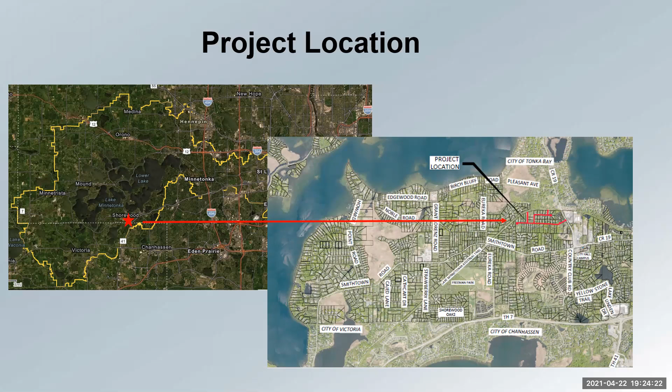The City of Shorewood is proposing to reconstruct, widen, and install curb and gutter along 3 roads within the Glen, Amlee, and Manitou residential area located in the northeast portion of the city. The area is located within the middle of our watershed and spans across 2 sub-watersheds that drain towards Lake Minnetonka. As a closer view, the white box highlights the 3 roads that make up the proposed project. This area is adjacent to the Lake Minnetonka Regional Trail, shown at the top of your screen to the north, with the City of Tonka Bay on the other side of the trail.

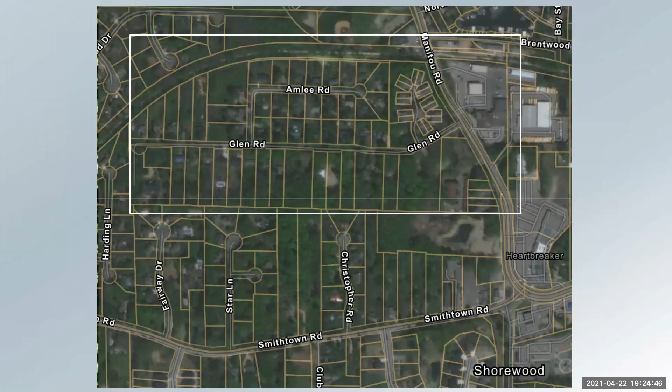Because this is a linear project spanning a number of roads, I wanted to ground the board with an aerial showing the existing conditions within the project area as a whole. While zoomed out, it shows Glen, Amlee, and Manitou roads in their entirety. Currently, runoff in this area flows overland, represented generally by the yellow arrows. There are 3 main existing drainage exit points within the project area, represented on the screen in blue: the Harding Lane outlet to the west, the Amlee Culvert outlet at the top of the screen which outlets underneath the trail, and the South Glen Road outlet to the east.

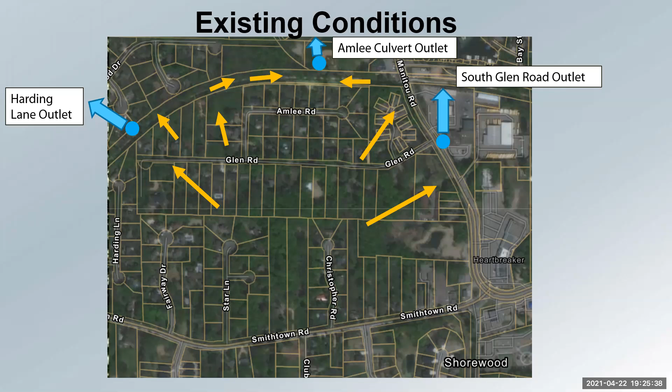According to the City of Shorewood, this area has been historically flood prone and is experiencing a number of erosion issues as a result.

There are 2 important existing features within this area I wanted to point out spatially in relation to the project, as I'll refer to them throughout the presentation. First is Amlee Wetland, a district managed 3 wetland, found at the north end of the project area, highlighted by the white box at the top of the screen. The second is an existing constructed stormwater basin referred to as Gideon's Pond, highlighted by the white star.

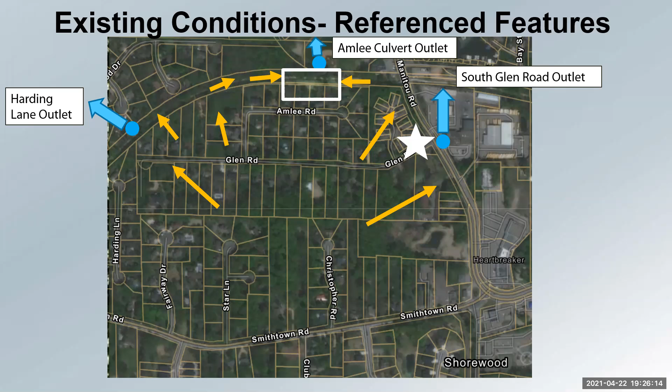Finally, this image, which might not translate well to your screen, provides a formal summary of the existing conditions, including the subcatchments used for engineering analysis, as well as drainage ditches found in the area. I won't be referencing the drainage ditches in this presentation for simplicity's sake, but further information can be found in the board packet, as these ditches were a component of the engineering and staff review.

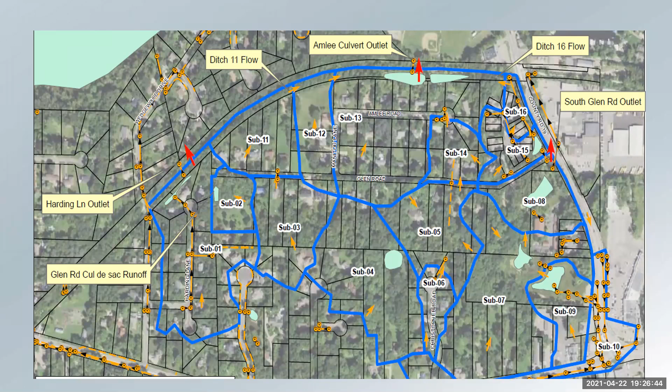As previously mentioned, the City of Shorewood is proposing to reconstruct Glen, Amlee, and Manitou, widening them and adding curb and gutter, and the associated storm sewer. A new cul-de-sac will be created at the west end of Glen Road as well, under the proposed conditions.

The stated purpose of this project is to decrease the volume of runoff through the residential properties within the area to address the historic flood and erosion issues. The yellow arrows represent a general new drainage pattern that would result from the proposed project.

In order to meet district standards, as I will discuss in the rule analysis section, the City of Shorewood is also proposing to create a new biofiltration basin to the west of Amlee Road, shown as the white star on the left, and then expand the existing Gideon's Pond, the white star on the right. In addition, a small rain garden will also be created in conjunction with that proposed Glen Road cul-de-sac.

Drainage in the area, as seen by the arrows, will be routed first through the proposed BMPs prior to exiting through those existing outlet points. This will result in a new stormwater outlet to Amlee Wetland. To clarify, this is different from the culvert that currently exists, which outlets that wetland underneath the trail.

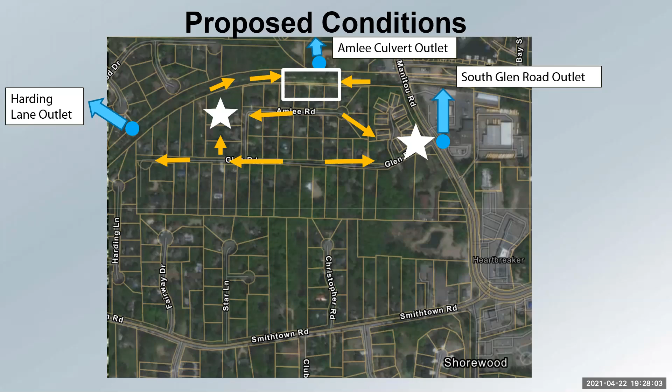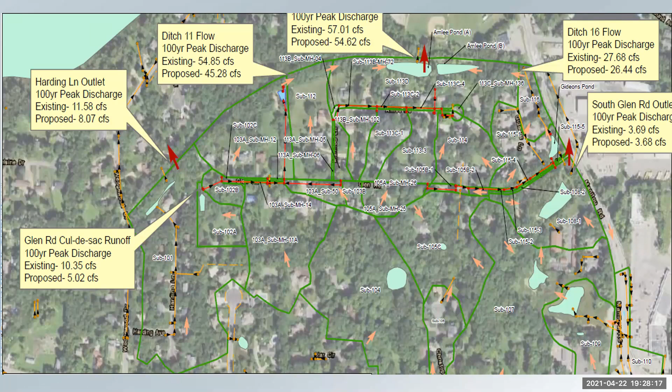Again, a bit of a busy image, but it provides the summary of the proposed conditions, formally showing any change in subcatchment areas, the drainage flow, and then also the storm sewer locations, which are in red.

Moving on to the analysis of applicable rules under this permit. First is erosion control. The district's erosion control rule is applicable to any project that proposes to disturb, excavate, fill, or grade greater than 50 cubic yards or 5,000 square feet. This project proposes to disturb both of those thresholds, and therefore analysis under this rule is required.

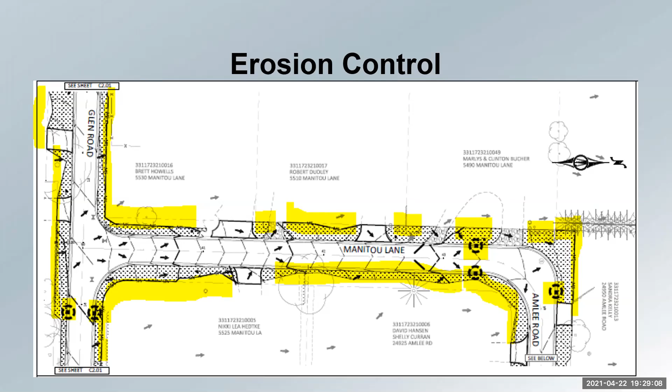On your screen is the erosion control plan. Highlighted is the perimeter control, and the hatched areas represent locations that would be temporarily stabilized with hydroseed and then permanently stabilized with sod. These are all erosion control specifics that meet district requirements. This screen shows Manitou Lane, and then the same thing on Amlee Road.

If the board would like to know more about the WCA permit history for this project area, including information pertaining to the reclassification I mentioned, I can provide additional information at the end of the presentation. However, this project does meet all requirements under the Wetland Conservation Act, and because of the no loss determination, the district's wetland protection rule is not applicable for this project.

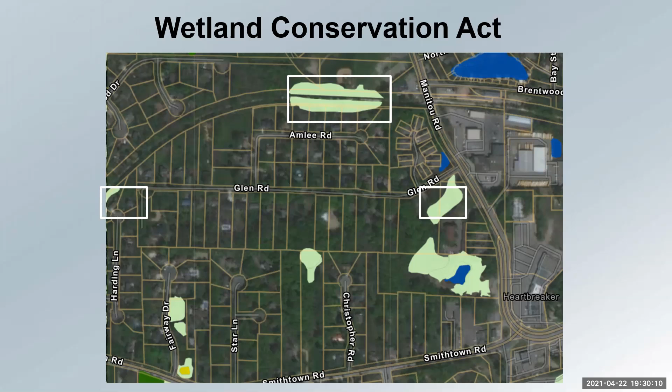District engineers have confirmed that the proposed project will not have any negative impacts on the downstream water bodies and will not increase the 100-year high water level of Amlee Wetland. As part of the review, the district also confirmed that any changes in flow as a result of the curb and gutter to the existing discharge points at Gideon's Pond and Harding Lane would not result in increased high water levels of these ponding areas.

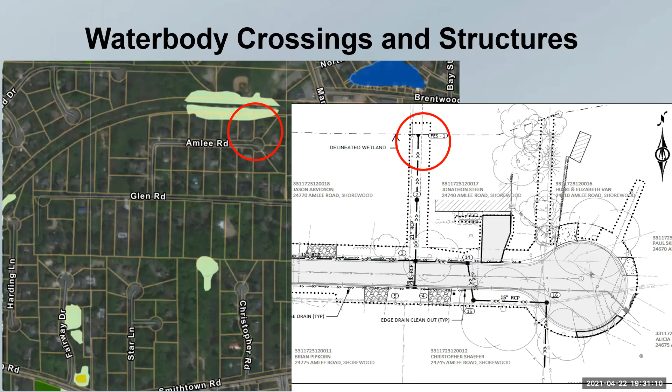Recording a maintenance declaration with the district for the outlet structures is listed as a condition of approval for this permit this evening. And as designed, the project meets the district's water body crossings and structures rule.

Finally, the stormwater management rule is applicable for this project, as this rule applies to any district project that alters impervious amounts within a project area.

Widening and reconstructing these roads and creating the cul-de-sac will result in an increase in impervious surface of just above 13,000 square feet, which pushes the project outside of the district's 10,000 square foot linear exemption, making it required to incorporate rate and phosphorus control for this additional impervious surface.

District engineers have confirmed that the proposed project will decrease rates for the 1, 10, and 100-year rain events and will also reduce phosphorus. It should be noted that in Table 3 of the permit report, which breaks down these rate reductions further, there's a typo in the total existing 100-year rate column. This value is entered as 156.9 cubic feet per second, but should actually be corrected to 113.2 cubic feet per second.

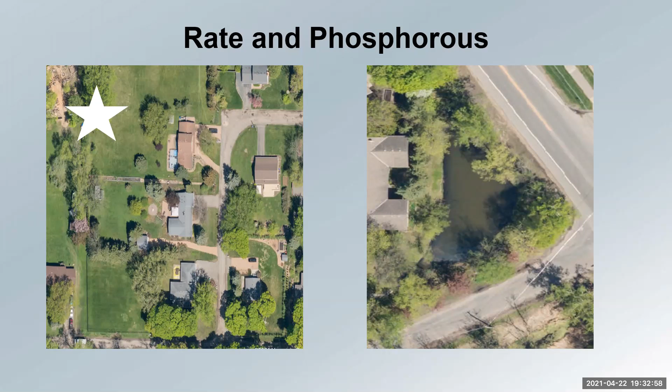Again, a maintenance declaration addressing the city's responsibility for these stormwater facilities is listed as a condition of approval.

In addition to phosphorus and rate control, the proposed project was reviewed under the downstream water bodies and high water level sections of the Stormwater Management Rule. The proposed project will provide protection for downstream water bodies as required.

Specifically, this section outlines the district standards of allowable bounce and inundation for each major rain event—the 1, 10, and 100-year rain events—based on the characteristics of downstream water bodies, as different ones will have different capacities to adjust. Amlee Wetland is the only natural managed water body downstream of the project where this portion of the rule is applicable. As mentioned earlier, it's a Manage 3 wetland, which means there are in fact allowable increases in bounce for the 1, 10, and 100-year rain events.

The proposed project does result in a 3.6-inch increase in bounce for the 1-year rain event, and a 0.36-inch increase in bounce for the 10-year rain event of the wetland. Again, these increases in bounce are within the allowable threshold for a Manage 3 wetland.

However, based on communication with concerned residents in the area, district staff and district engineers reviewed expanded information to determine if this increase in bounce could potentially be reduced. Based on that review, district staff and the district engineer concur that the increase in bounce has been mitigated to the greatest extent possible.

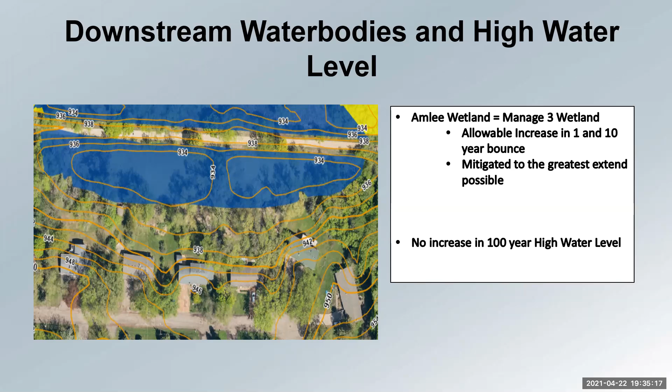Under current conditions, the existing structures don't have 2 feet of separation from the high water level of Amlee Pond, and they historically have not. The district engineer has reviewed this area and confirmed that the 100-year high water level of Amlee Pond is not going to increase as a result of this project, and that the proposed project will actually provide a slight amount of additional freeboard for these existing structures.

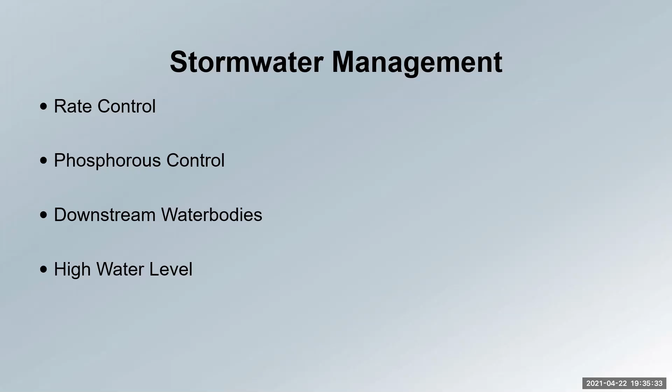In summary, the project has been reviewed for these 4 applicable components of the Stormwater Management Rule: rate control, phosphorus control, downstream water bodies, and high water level. The project meets the Stormwater Management Rule as proposed.

The proposal in front of the board this evening does meet all applicable district rules. Staff recommend approval of permit 2591 with the condition that a maintenance agreement between the district and the city of Shorewood documenting city responsibility for the stormwater facilities and water body outlet structures is executed. As a result, the requested board action this evening would be your consideration of permit 2591, the city of Shorewood's Glen, Amlee and Manitou Road reconstruction.

Thank you. Any questions? Thank you, Ms. Barlow. Is there anyone who wanted the additional information that Ms. Barlow offered?

Gene, I just wanted to ask—was there any other response from the neighborhood or the people that live in those areas? I know you talked a little bit about it, but was that all?

Yes, I did have a number of conversations, both prior to the formal start of the project. We had residents reach out to the district to start to gain an understanding of what we would actually be reviewing during the process. Then once public notification went out for the project, I spoke to a number of residents. I believe some of them are in attendance tonight who have concerns, but for the most part, after all these conversations, residents walked away with a better understanding of what the district is and isn't reviewing in conjunction with this project.

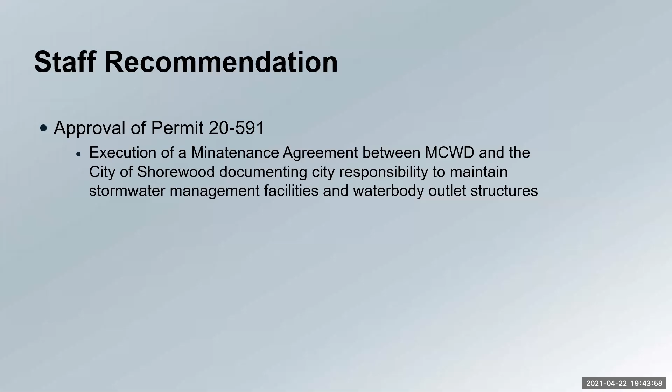So because I don't understand all the drawings and all that, I only see that the culvert is 48 inches and it's going to flow into a culvert in the park, which is owned by Tonka Bay, which is only 15 inches. How is that going to work without flooding Manitou Park? So again, forgive me if I don't understand. Just let me know what I'm seeing and what I'm understanding.

Thank you for your question. Are there any other residents who wish to speak? Then Mr. Wisker, I'll turn back to you.

Yeah, again, just President White and for the homeowners that have, thank you for taking the time to show up and provide your comment into the record. I'm wondering if we might turn to Chris, Chris Meehan, the district's engineer, to work with Grace here just for a moment to recap very concisely the scope of the project in terms of change in hardcover, and then what the watershed district's regulating for volume, for rate, for quality and bounce. I hear those at the root of the questions that we heard from the 2 homeowners that just commented. And if you could just frame what the scope is, how the rules apply, and how the rules are met with regards to those capacity, bounce, and quality questions that were just raised.

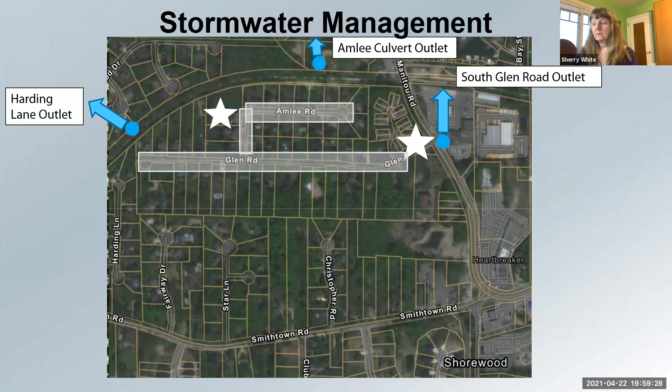All right, then voting on the permit with the condition as stated regarding the maintenance document. Manager Maxwell? Aye. Manager Olson? Aye. Manager White votes aye. Manager Loftus? Aye. Manager Sando? Aye. Manager Miller? Aye. Manager Hejmati? Aye. Thank you, the permit is granted.

Thank you to staff and Mr. Meehan, and also to the residents who came and expressed their thoughts about the project. Appreciate it.

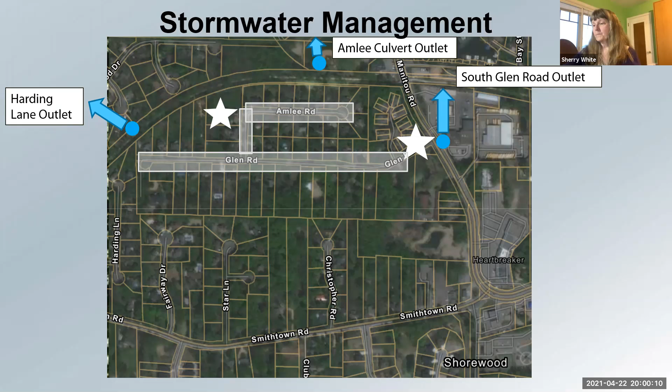Our next business item is 11.1, which is the financial audit and fund transfers. We have Mr. Andy Herring here from Redpath and Company.

Thank you. Good evening, Board of Managers. I try to get my screen sharing and talk at the same time here. I think I am set.

So my name's Andy Herring from Redpath and Company, the CPA firm that the district hired to audit its financial statements once again this year. We've completed our audit and performed the audit in March, met with the management team right at the end of March. We had an executive committee meeting this morning where I presented the audit results, which brings us to the board meeting now to go over the audit results. So I will summarize the audit results here. I won't go into too much detail, but I'd be happy to answer questions as well.

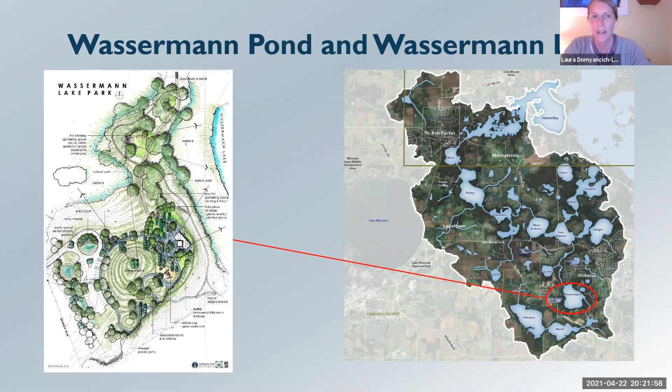If successful, the combined alum treatments are projected to reduce internal phosphorus loading to Wassermann Lake by an estimated 90%, for a reduction of 336 pounds of phosphorus per year. This reduction positions Wassermann Lake to be removed from the state of Minnesota's impaired waters list.

These alum treatments, which are funded in part by 2 Clean Water Fund grants from the Board of Water and Soil Resources totaling $379,000, are the culmination of an 8-year effort to implement a comprehensive restoration strategy around Wassermann Lake, which has included carp removals and construction of a carp barrier, bringing carp biomass in Wasserman Lake below that targeted 100 kilograms per hectare threshold.

It's also the development of the Wassermann Lake Park project, which will be completed in June. This addresses the internal loading of phosphorus in Wasserman Lake as the final step in this multi-pronged effort to protect and improve water quality and also support ecological integrity in the subwatershed.

In addition to the significant grant funding, the effort to implement the alum applications has also been strongly supported by both the Wasserman Lake Association and area residents. The Lake Association really has been instrumental in our efforts to engage the community about the alum applications and the district's work more generally.

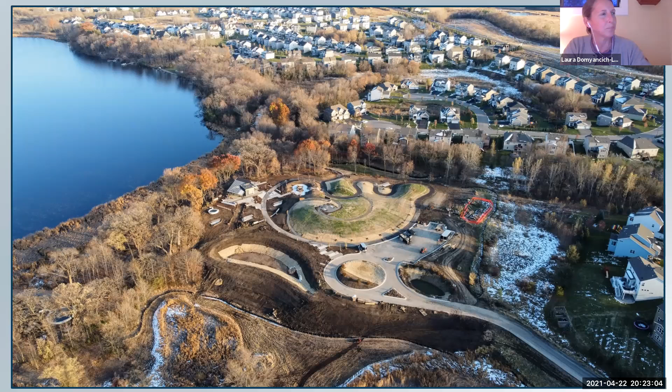You'll recall that the design of the alum treatments was informed by the significant water quality monitoring and sediment phosphorus analysis performed by district research and monitoring staff throughout 2020. Following this data collection and analysis, the district entered into a design and construction oversight contract with Stantec, formerly Wenck Associates, to develop protocols and specifications for the alum treatments and to eventually provide a limited amount of construction oversight during the applications.

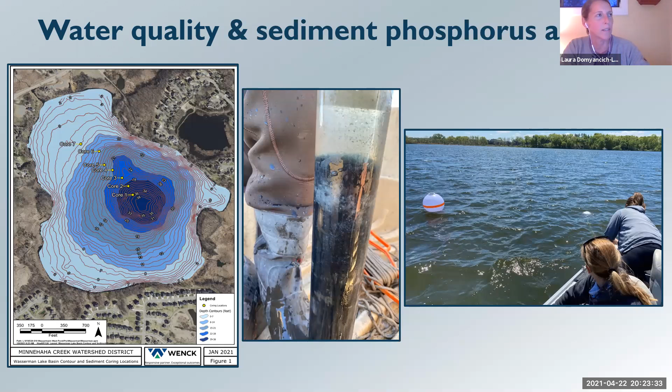On March 25th, the Board of Managers authorized staff to accept quotes from Clarke Aquatic Services and enter into contracts for the alum treatments. But in staff's recent coordination with both Stantec and Clark to plan the operations for the treatments, we've identified a need for Stantec to expand its role in construction oversight.

This is based on staff's desire to ensure that the treatments are implemented to our strict specifications and that the contractor has any and all support they might need during the applications.

Stantec's construction oversight scope will be expanded to include monitoring of water chemistry characteristics throughout the treatments, and also review of daily application logs. Stantec's on-site observation will be adjusted as needed, and costs will not exceed $15,600, which again is covered by the grant.

In terms of next steps with board authorization, the Stantec construction oversight contract will be amended to include the scope of work that's included in your packet.

Over the last few weeks, staff has been in coordination with the contractor to set a start date for the applications and also to acquire necessary permits from Carver County for traffic control and also the Minnesota DNR for use of the public boat launch on Wasserman Lake.

Once the firm schedule is set, staff will be providing information on timing as a follow-up to the community meeting that was held over the winter. We expect the treatments to begin within the next 1 to 2 weeks, depending on water temperatures.